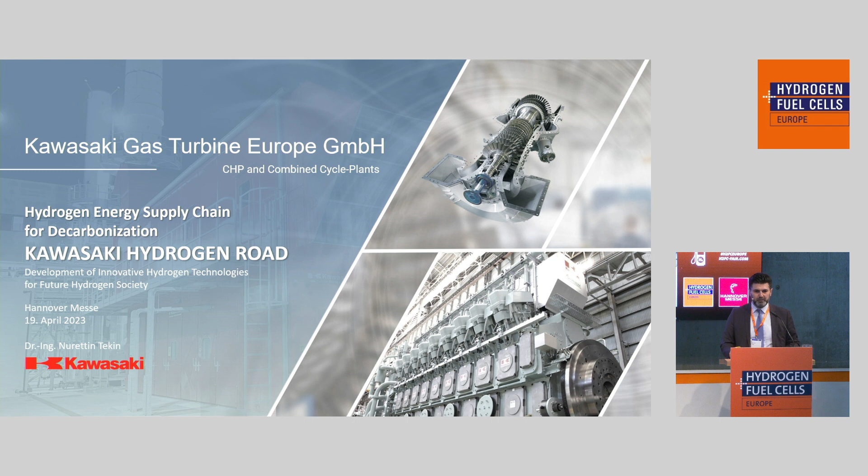We as Kawasaki Gas Turbine Europe and Kawasaki Heavy Industries, I guess the brand Kawasaki is already well known, but most people have the one and only association, which is our fabulous motorcycles. But beside our motorcycles, we're doing a lot. We are a big worldwide company, and especially in the field of hydrogen, we are quite active.

So the question is, what is the so-called Kawasaki Hydrogen Road? The basic idea of this road is quite simple. It is a worldwide import of huge amounts of hydrogen, including overseas transportation. Of course, Japan is an island. To implement such an infrastructure, it is needed to produce huge amounts of hydrogen, and to cover this, we believe that it is quite difficult to do that only with green hydrogen.

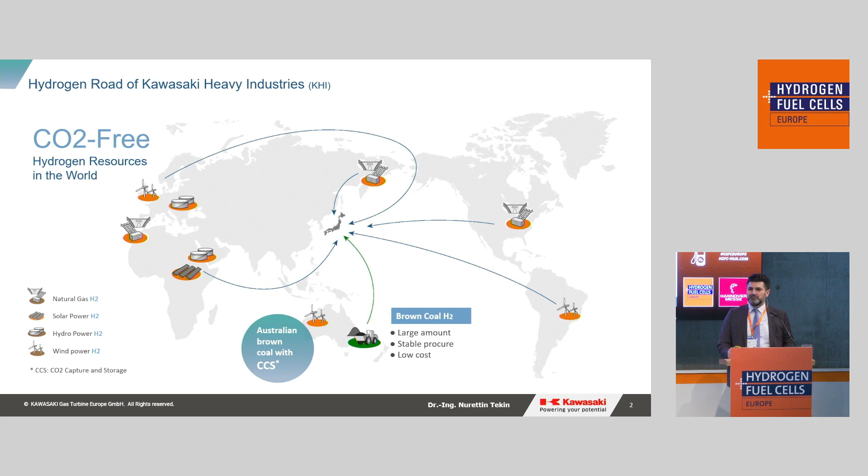So our starting point will be Australia, based on gasification of brown coal with additional CCS, carbon capture and storage. So the starting point is the import of so-called blue hydrogen. And you can imagine the realization of such an idea is quite challenging. To do that, you have to focus on the whole supply chain, starting from production, storage, transportation, and utilization. And for each link within this supply chain, we have developed a lot of different products.

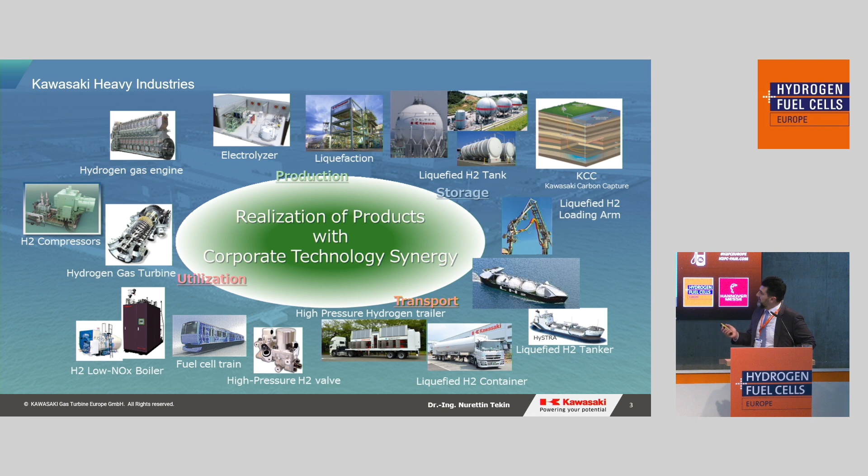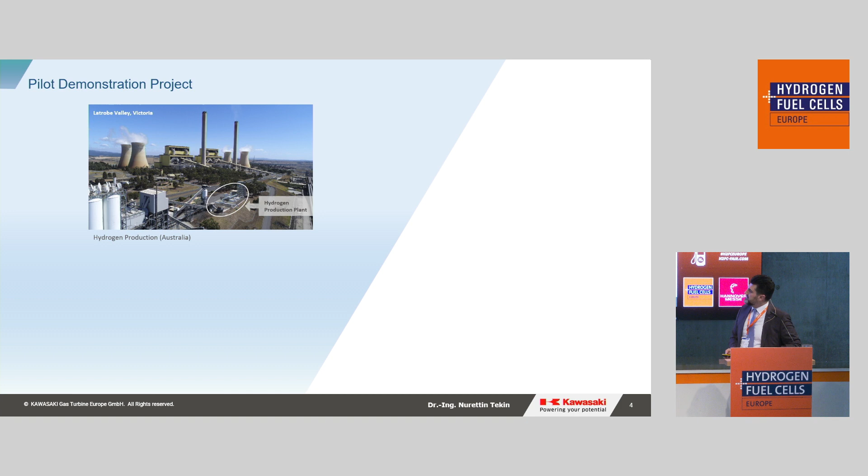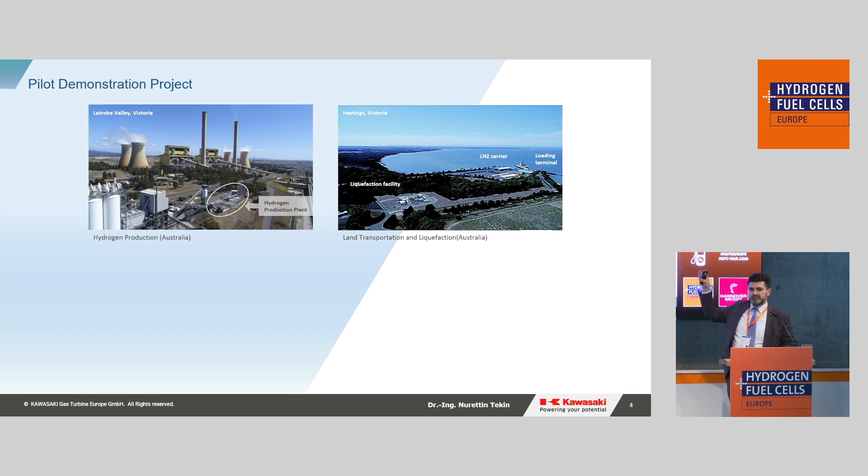The produced hydrogen is transported to our liquefaction facility, also in Australia, in Hastings, and after liquefaction it is transported to our loading terminal, and from this loading terminal it is loaded onto the ship. The launching ceremony of the ship was already in 2019, and this ship is a first pilot ship, a small ship with a transport capacity of 1,250 cubic meters storage volume. This ship arrives at the port of Kobe, which is the world's first hydrogen receiving terminal.

And this is a picture of 2020, so 3 years ago. So as you can see, we realized this whole chain by 2020, and the arrived hydrogen, I forgot to mention, is of course liquefied hydrogen. It's not gaseous, because due to the long-distance overseas transportation, you have to follow the path of highest energy density, which is the liquefaction of hydrogen.

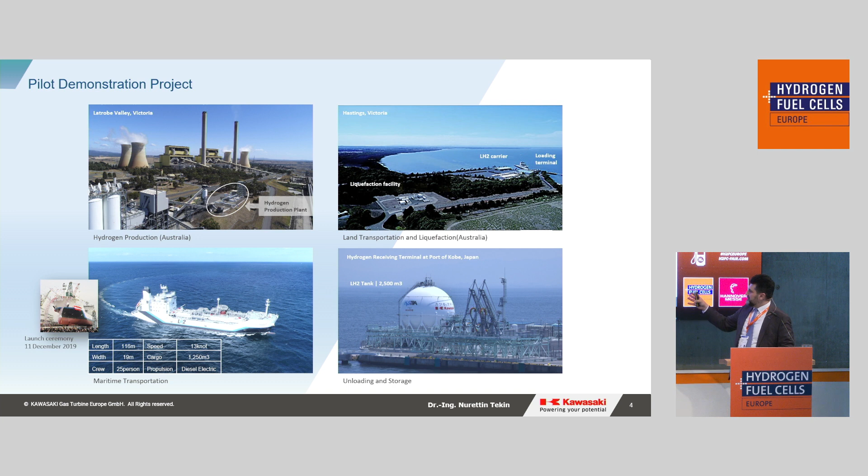The liquefied hydrogen which arrived at this terminal can be used in the, once again, world's first 100% hydrogen CHP power plant, which is also built at the port of Kobe, and its commissioning was in 2018. You can see this liquid hydrogen storage tank. The hydrogen is gasified, compressed to the inlet conditions of the turbine, and at the upper right corner you can see the first hydrogen-fueled gas turbine.

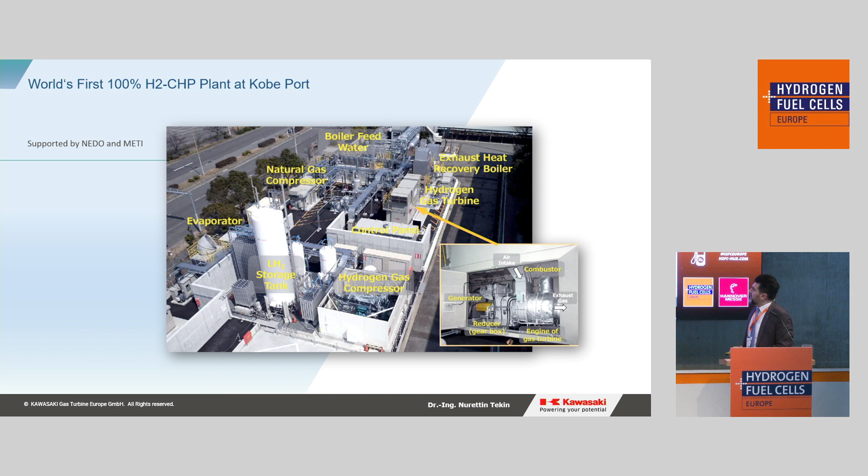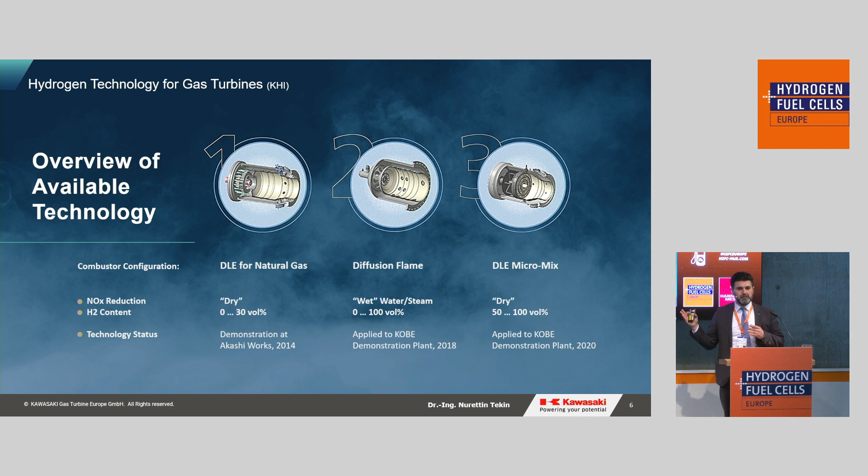For the gas turbine itself, the key component is of course the combustor. We have developed in total 3 different combustors with different hydrogen capabilities. The first combustor has a hydrogen capability from 0 to 30 volume percent, and this is our standard combustor. Beside our standard, we provide 2 different combustors up to 100 volume percent hydrogen capability. The second one is the so-called diffusion flame combustor. This provides you full flexibility from 0 to 100%. This means this gas turbine can be operated with 100% natural gas, 100% hydrogen, and any mixtures of both.

The third combustor is the so-called DLE micromix combustor. This is the world's first DLE combustor, which is a dry low emission combustor for 100% hydrogen application. In the beginning, we developed this combustor for 100% hydrogen only, but with further improvement, as of today, we can inject into the hydrogen up to 50 volume percent natural gas. This combustor is very innovative and still unique, and it was awarded last year the Innovation Award of the German Gas Association.

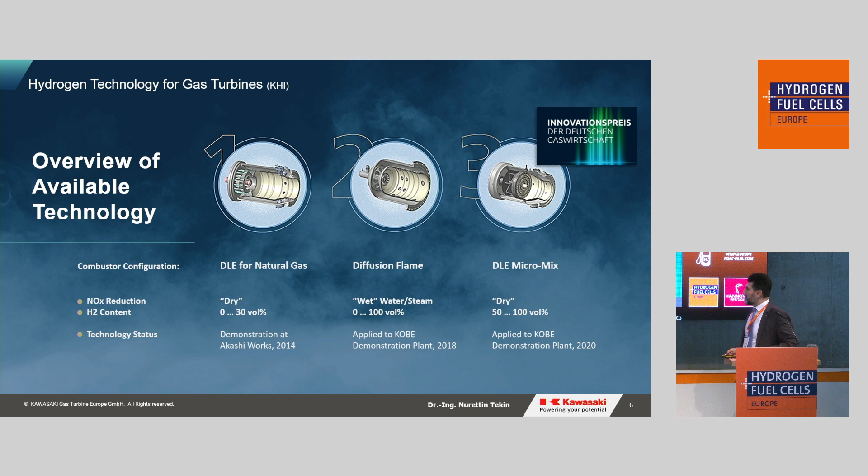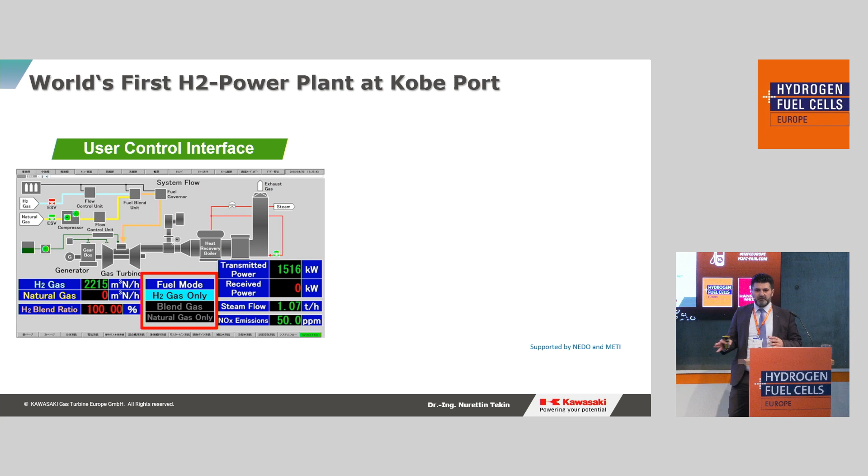On the left-hand side, you can see a picture of the user control interface of this CHP power plant in Kobe. I would like to draw your attention to the different fuel modes. As I have mentioned, we provide full flexibility in operation, and the operator can choose between hydrogen gas only, blend gas, and natural gas only operation, more or less by a touch of a button, without any physical exchange of components.

On the right-hand side, you can see the main parameters of this unit in comparison for natural gas operation and for hydrogen gas operation. I guess such a comparison is quite interesting to see what the difference is between the two operations. When you compare all the main parameters like electrical power, fuel input, efficiency, exhaust gas temperatures, and mass flows, you can see there is no significant difference. The main difference is, of course, in emissions. The NOx emissions slightly increase from 37 ppm to 73 ppm. This is due to physics.

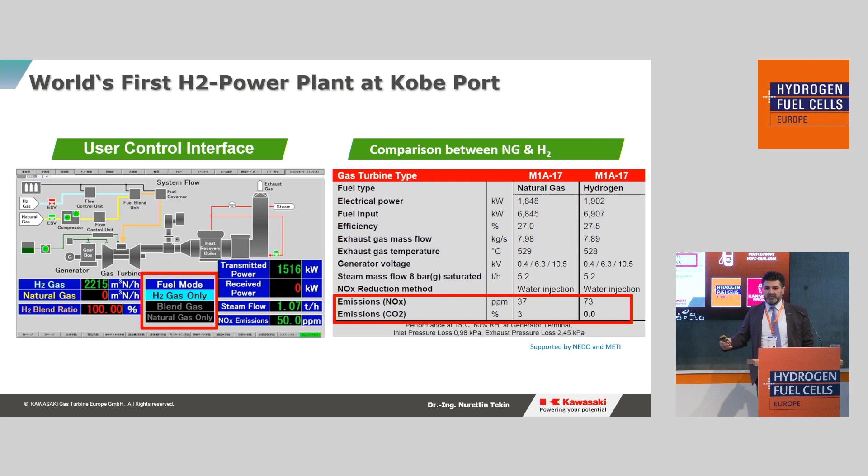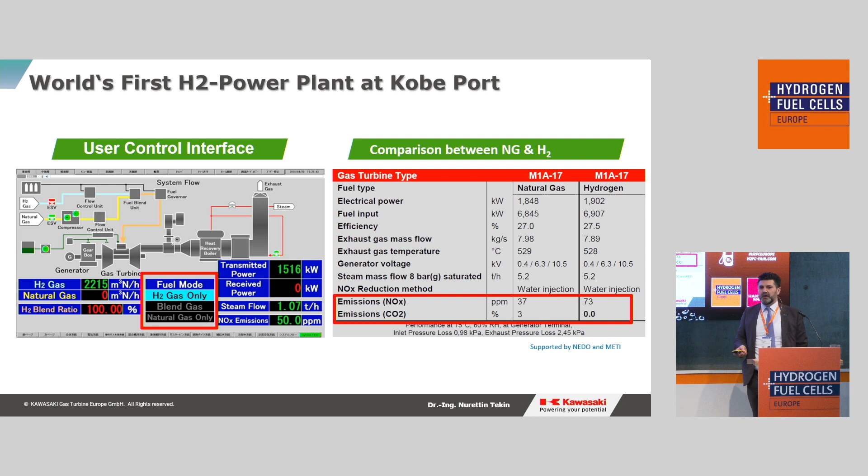You will always have, under the same boundary conditions, higher NOx for hydrogen compared to natural gas combustion. But the main point, of course, is you have a completely decarbonized system. The CO2 amount within the exhaust gas decreases from 3% to 0. With this unit, which is a small gas turbine of around 2 megawatts electrical power, the CO2 savings are around 12,000 tons per year.

A further advantage of our equipment is the interchangeability of the combustor. On the left-hand side, the commissioning of this unit in 2018 was with the diffusion flame combustor, and after successful testing and demonstration, we replaced it in the same gas turbine unit with the micromix combustor, which provides you additional flexibility in operation. This is very important because, as of today, nobody knows how fast the market will develop, the available amount of hydrogen, the cost of hydrogen, and so on.

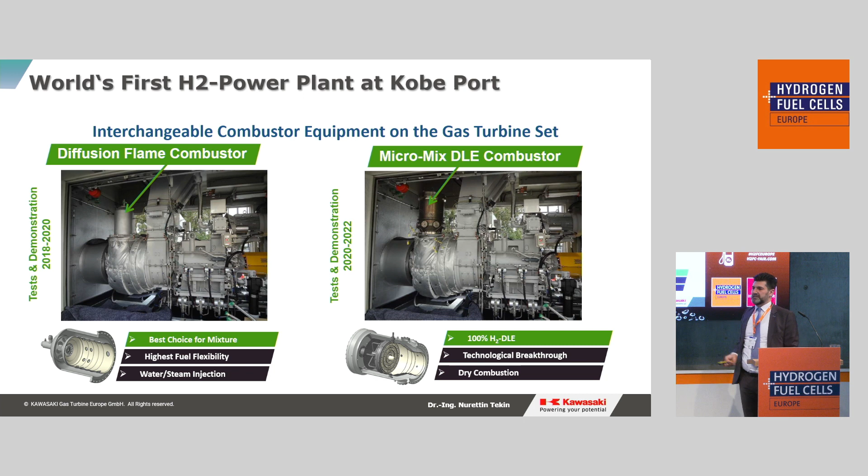So with this setup, you are fully flexible, and you have no investment risk. You can operate your unit today with natural gas, with up to 30 volume percent hydrogen admixing, which is our standard, and depending on the market development, you can adjust your gas turbine unit. This was in regards to what we have already done and successfully demonstrated.

Within the next 2 slides, I would like to give you a brief introduction of what we are going to do. One of the first projects in Europe will be this joint undertaking between Kawasaki and RWE. The commissioning of this unit will be in 2025. So in the next 2 years, we will install at the location of Lingen the first 34 megawatt electrical output gas turbine with 100% hydrogen operation. This is one of the next projects.

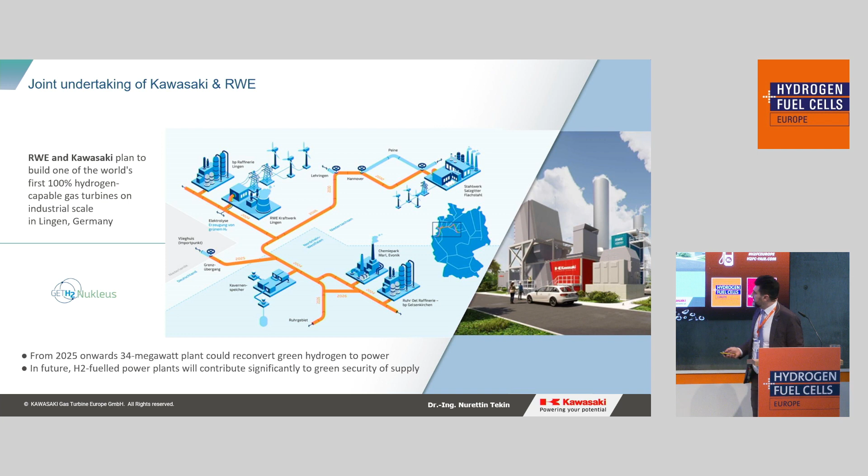Another project which we will realize very soon is with our small gas turbine unit of one of our existing customers. It's located in Belgium, at Chevron Phillips, and since 2021 the 2 megawatt unit has been in operation. This is a chemical customer, and during their processes they have hydrogen-rich gas as a byproduct, and they have no use for it. The hydrogen content of this gas is around 85%.

The amount of this byproduct gas is not sufficient to operate with 100% hydrogen, but we can use it, and this unit will be operated with up to 30 volume percent. In further steps, when the amount of this hydrogen-rich gas increases, we can easily adapt the system up to 100%. This will be in operation in August, latest September of this year.

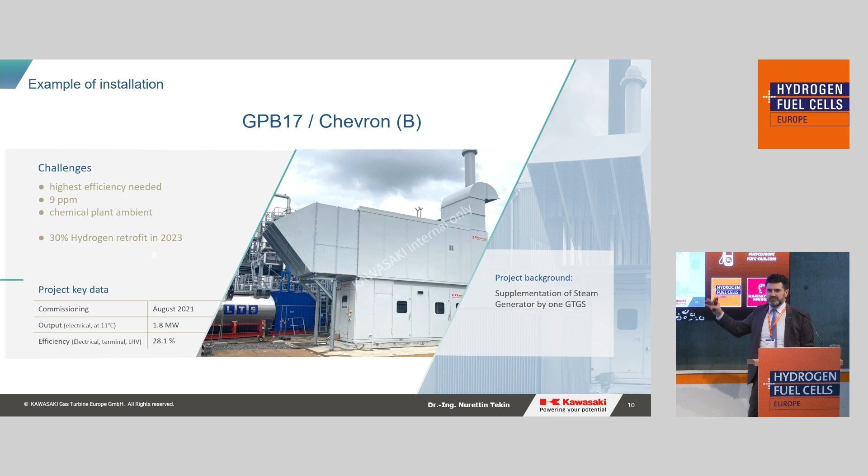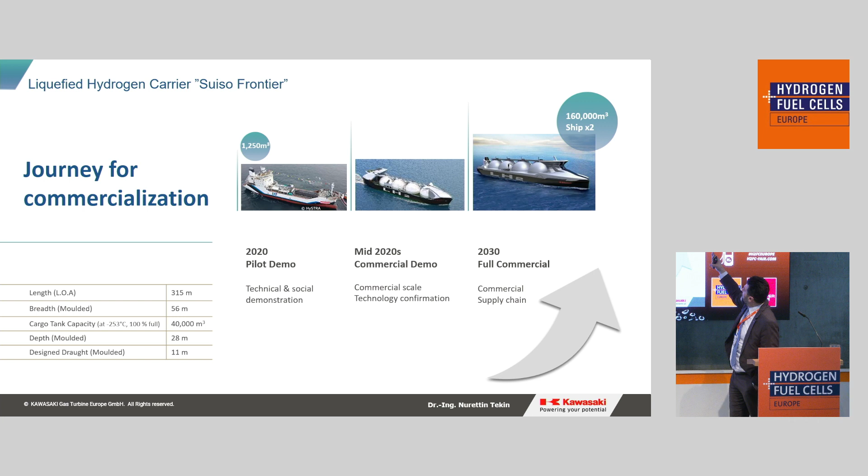This is my last slide and my last words: what we are going to do in the near future. As I have mentioned, all we did is in a pilot demonstration phase, and we will scale it up as soon as possible. As of today, the capacity is 1,250 cubic meters, and the idea is to build full commercial ships with 160,000 cubic meters transport capacity for each ship.

In 2030, 2 ships are in planning. The first ship, I guess, we can expect for 2027, 2028. So within the next 5 years at the latest, we will have the first full commercial ship.